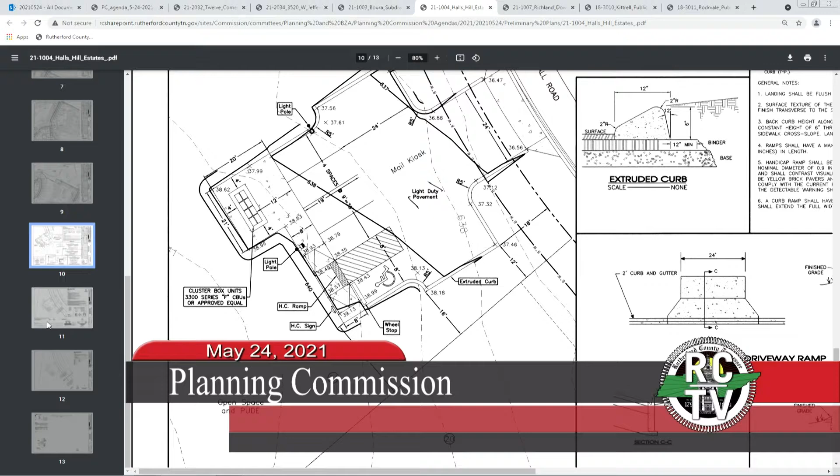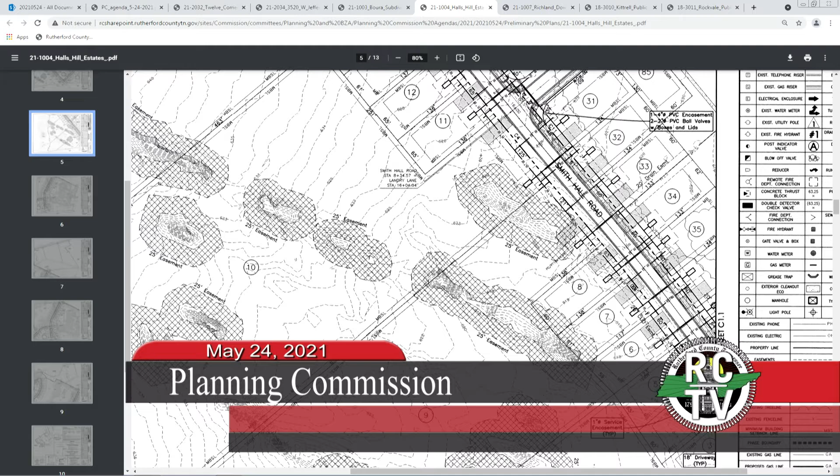These are the ones I was talking about. It's going to be tricky getting a step tank, and they're showing a driveway right here next to the step tank on the edge, so that sinkhole is going to have to get modified, at least to allow a safe passage through here. But then they've got this other sinkhole they've got to cross to get back to the area in the back.

So these will most likely be critical lot grading plans because of the geologic features here, and we will pay special attention to those. But like Doug said, they have addressed our comments, and we will work with them on the design of the construction plans.

Right, and that was some of our concern. When the original development came in, they had proposed to extend streets back in here, the road network and everything, and the lots were a lot larger, but they did extend into this area. If you've ever seen a USGS map, you can kind of see sinkholes will line up and look like a tree, with branches of sinkholes coming off in other directions.

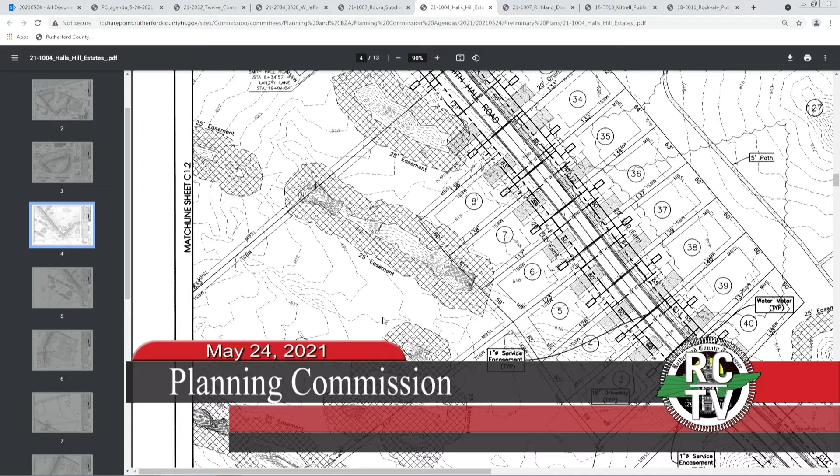So can the property owners, like on those large lots that have all the sinkholes on them, can they do anything with that back lot? Yes, that's their property. They can use it as they see fit. But any construction around any of these identified sinkhole areas would definitely need a geotechnical report if they wanted to build anywhere near those.

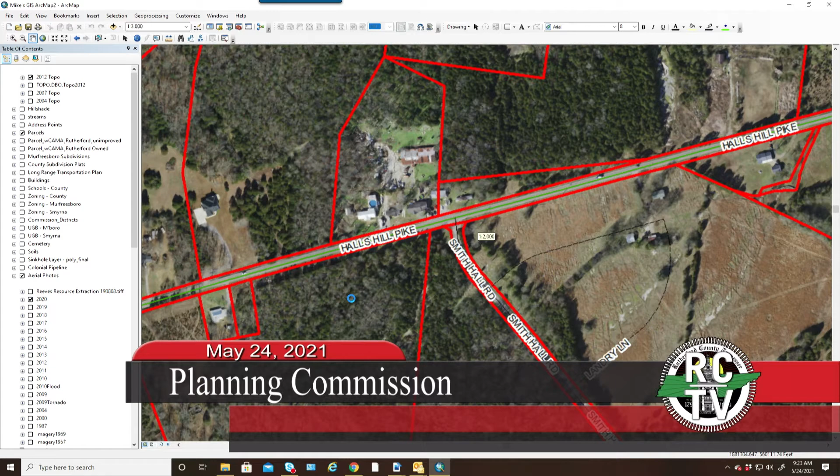Looking at the land, the soil, I believe it is mostly our old friend Gladeville rock.

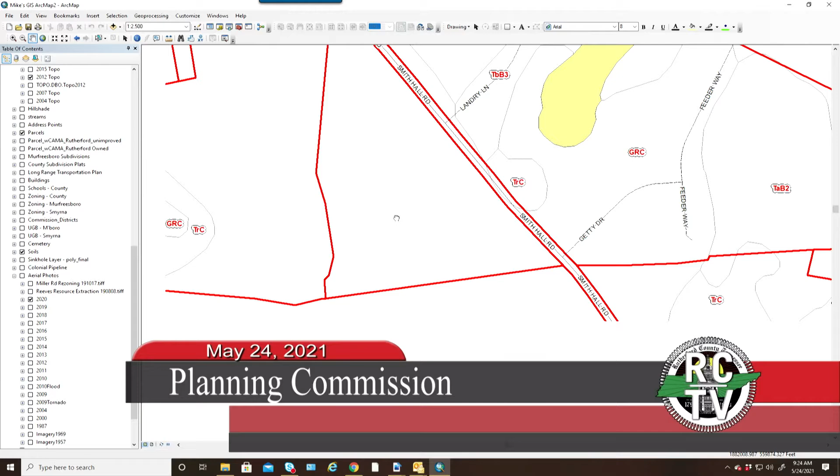Yeah, GRC, Gladeville rock. So it's just rocky ground, and if they do a conventional septic system back here, they're using the good low area for their septic system.

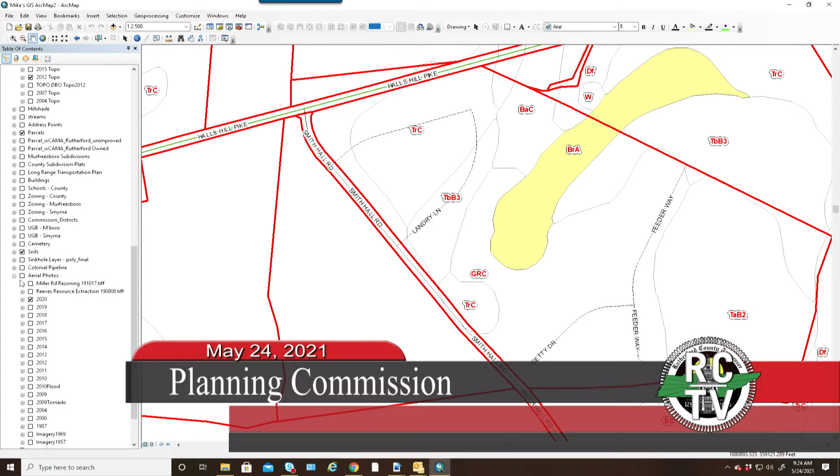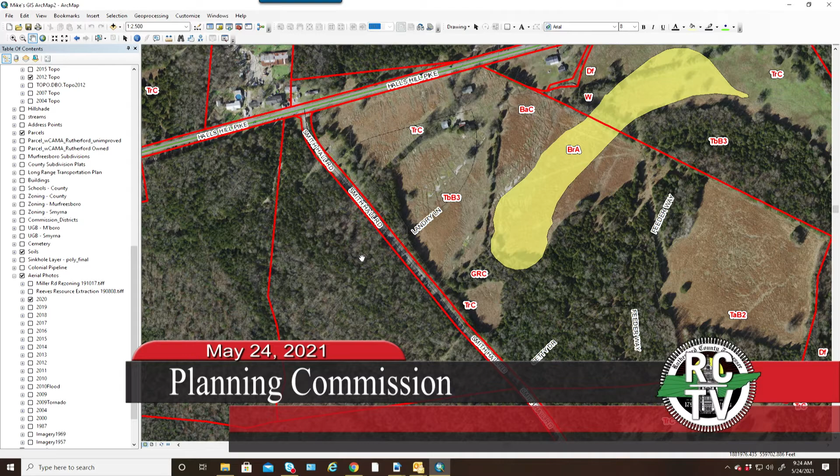You can see on an aerial that you've got a piece of property with heavy tree cover. There are several reasons - it's either too rocky, too steep, or there's some other feature that it can't be farmed, and that's been the case with this one. It's too steep and rocky.

So that's what we're making sure with construction plans review, with home construction, anything - this is an area that we're going to have to keep special attention on.

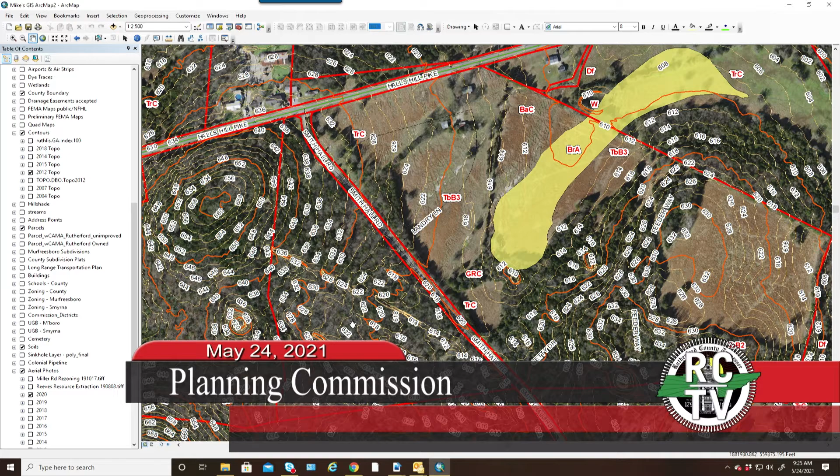There'd be notes that relate to discharge. I know some sinkholes discharge at times - would these be identified whether they ever have any discharge? Well, the underground connectivity of the sinkholes, the karst terrain - most sinkholes are connected one way or the other. And sinkholes take on water, but they can also pump water out.

So it will need each lot on that side specifically will need a critical lot grading plan to make sure that the house is protected in an elevated area. So if the sinkhole does fill up and start to spill out, it won't be directed toward the house - it can go a different direction away from it. We'll have to keep special attention to it.

So I don't mean to dominate the conversation, you guys.

Why did the developers decide not to develop what was approved before and go with something different? I think a lot of it had to do with the location of those sinkholes. Prior to this particular design, they were looking at 15,000 square foot lots, but those sinkholes were impacting a lot more of the individual lots than what this plan is showing. There are still some that are there that are impacting lots.

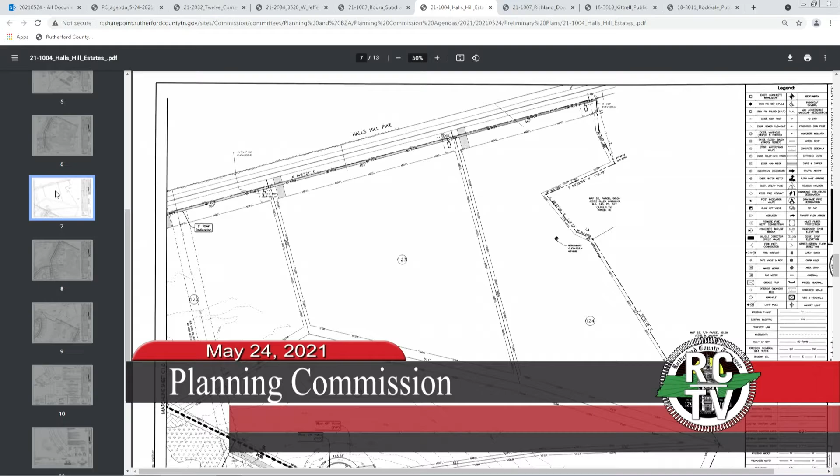Okay, so right here you can kind of see at the top of the page, you could probably get one or two lots right there, and move that playground towards the kiosk up front where you've got a parking area. That was just us thinking out loud.

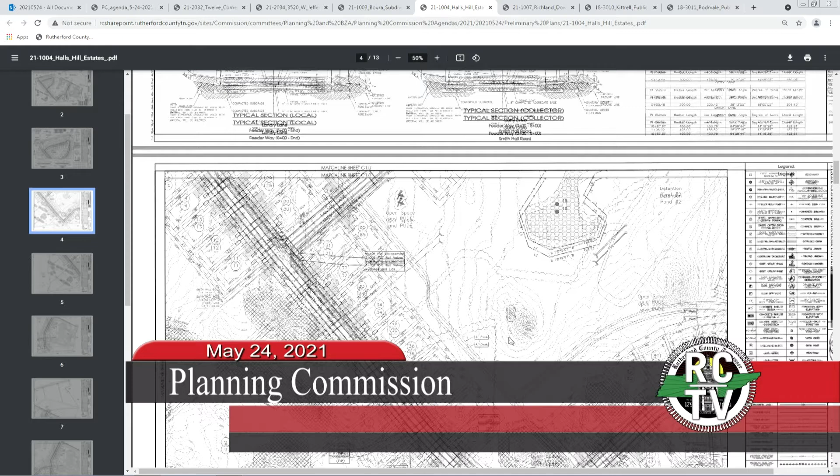Why not move that playground over here, and people can come over here and park and let the kids play, pick up their mail, and then go back to the house. Then you can pick up a couple lots there instead of having these big open space lots that you've got to span these sinkholes. The ground looks pretty good where this playground is located. So that was just our kind of a side thought.

I know this is a preliminary plan, and we'll have to see it again, but it looks like there's a lot of information that needs to come to staff before a final plat is presented to the Planning Commission. And from a preliminary perspective, is there a recommendation from staff?

As far as the comments we had, I think we were comfortable with what they were presenting, as far as did it meet our regulations. So from that standpoint, from just the preliminary plan, I think we're okay moving forward with it. Now there's still a lot of information that needs to be brought forward during the construction plan phase, and that'll have to be all fleshed out before you ever see a final plat come before the Planning Commission.

Sinkholes are pretty common. They still make me nervous, but as long as you've got a good geotechnical engineer... and down here on lot 1, you can kind of see one into the road a little bit. That's definitely going to have to be taken care of. We don't want our road failing, but is it the best idea?

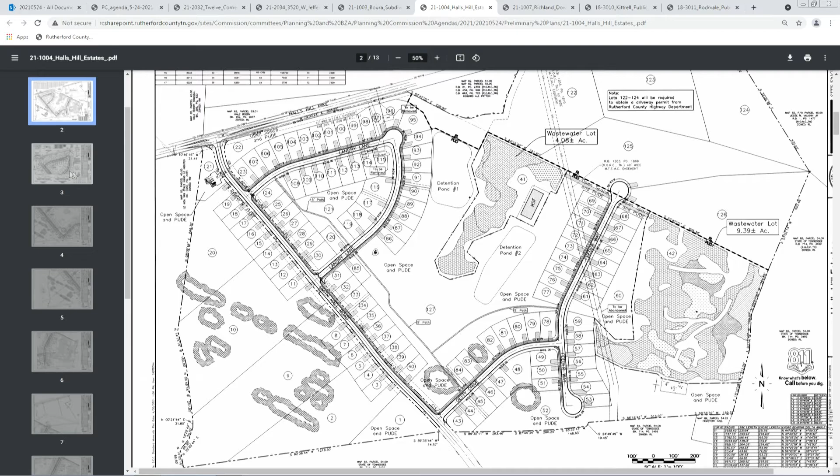Just to preserve those sinkholes and what you were worried about - it's not necessarily the sinkholes that you see, it's the sinkholes that you don't. Right now, the owner, if he builds on it, he might be 300 feet away from any of the sinkholes, and in theory it could still have a sinkhole there, but that could be said anywhere across the county. We do the best that we can, and the geotech would have to be comfortable with what was built, because most of these will have to be critical lot, as Mike said.

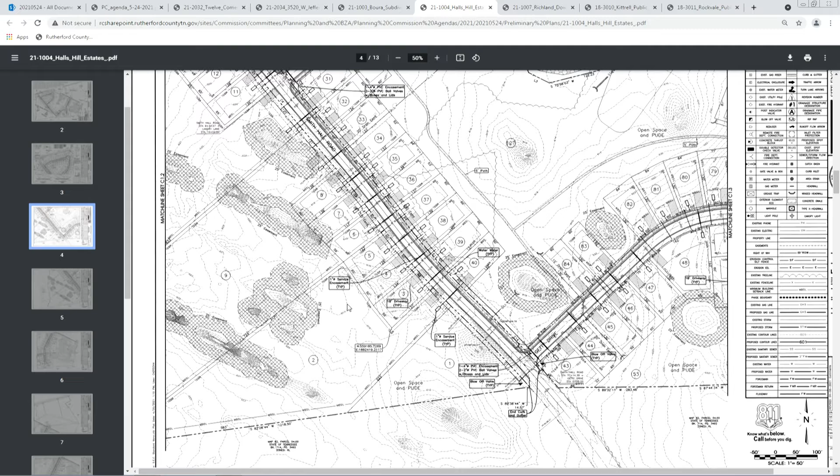So we had one that surprised us, at Creeks Bend, where it crossed the road in several lots that John T. Holloway had to pay to have closed. It was pretty substantial. Once construction has started and all the trees have been cleared out, it is possible that they would find more, but anything additional they found, they would have to close.

It's the thought of large lots that have sinkholes on them. Why that instead of creating just normal sized lots and using that as common space, so that the HOA would have responsibility for it and not the property owner?

Well, I think a big part of that now is just people still want those larger estate lots, and they're very hard to come by. So it's kind of a give and take. I know the lots on Clear Creek, those estate lots, they're quite large, but you have probably 300 feet of it that's not buildable because of floodway, floodplain, etc. And it's kind of the same situation on these.

Whatever house plan came about for those larger lots, they still couldn't build around those sinkholes. So they're still restricted, but they would get the benefit of having a larger yard and lot. Because I know the county gets lots of complaints about people only having a 20-foot backyard. Right, so that's one of the benefits of leaving it as somebody's property - they get a nice area.

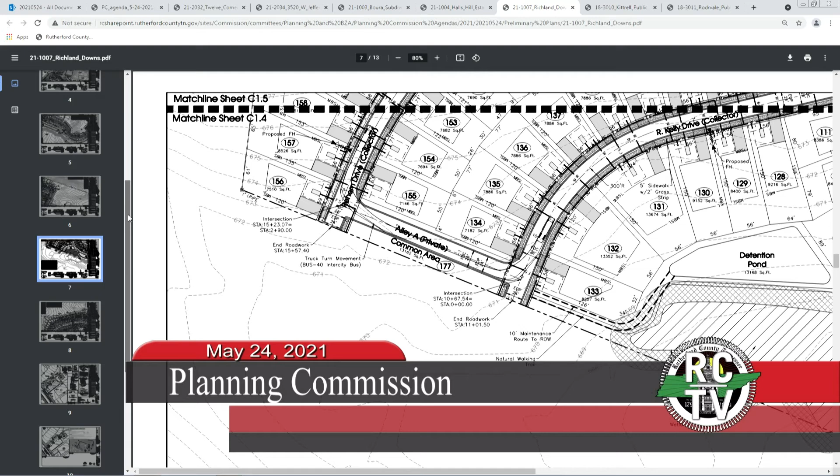It's kind of a little bit different from what we've seen in the past. And like Doug said, there will be a connection here.

Ideally, these roads will be completed at the same time. We won't need temporary turnarounds because the layout of the driveways and step tanks would be in the way of a temporary turnaround. We'd rather not have one, because these lots would probably need to wait until it's removed.

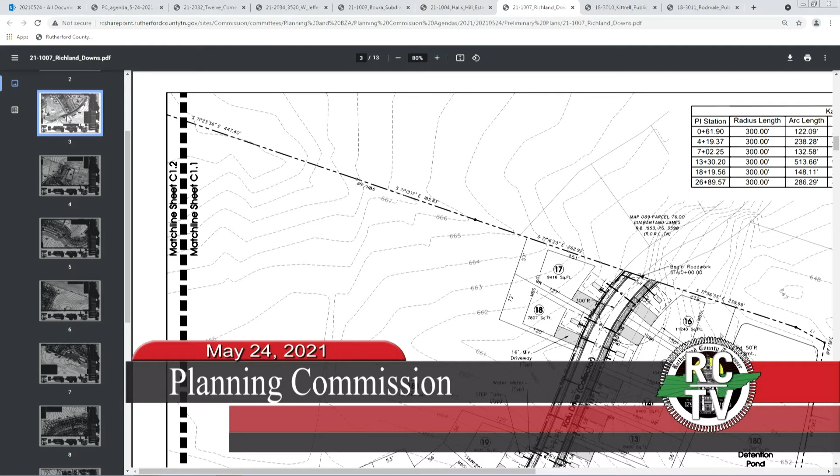There were some streams identified and wetlands, but they've kept the development out of those streams and wetlands. There's an area on the southwest edge of the property, and there's a little stream that's been identified that meanders in and out of the development.

Let's see, what else? They are proposing several stormwater detention ponds. Let's see, 1, 2, 3, 4, 5, 6, 7, 8, 9 detention ponds. So because of the way the land breaks in several different directions, they'll have these different stormwater management areas.

There is a mail kiosk in this location. Everybody will be getting their mail here. Let's see if I can find where that shows up on the plan. You kind of see it here with a little playground area, the mail kiosk, and a bit of a walking trail there.

All in all, like Doug said, I believe they've addressed all of our concerns on the preliminary, and we will review this in more detail with the construction plans. Thank you. Questions, comments?

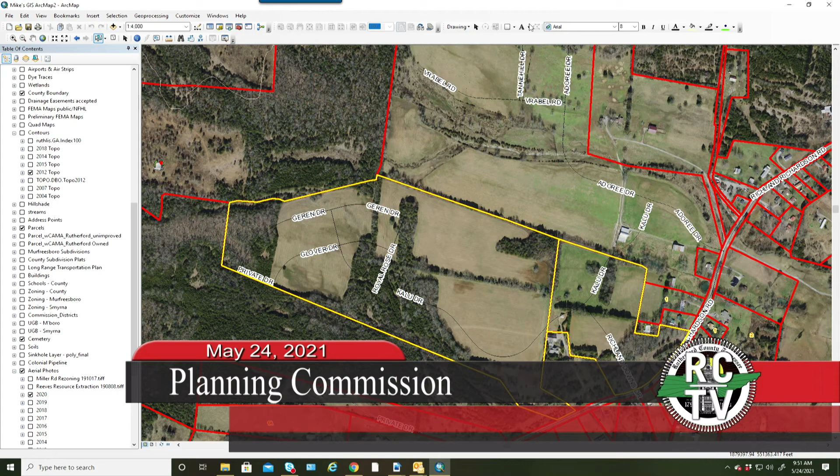Mr. Chairman, I have a question for Mike. Mike, you identified wetlands. Are they having to do any wetland mitigation, or are they just leaving those undisturbed? They're going to leave them undisturbed, preserve it, and keep a buffer around it. Likewise, the stream that it empties into will have a buffer, and we'll preserve those.

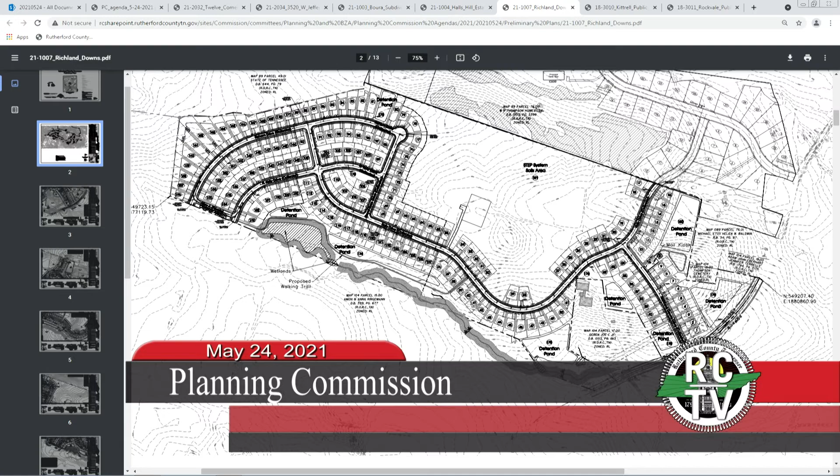Mr. Chairman, if there's no other questions, I'll make a motion that we approve, subject to all staff comments. We have a motion and a second to approve a preliminary plan for Richland Downs, item number 21-1007. Other questions or comments? All those in favor of the motion to approve, please say aye. Any opposition? Motion to approve carries. Thank you. That concludes our preliminary plan. We've just preliminarily approved over 300 new lots.

6B, items submitted for final plat approval. 6B1, the item number is 21-2034: 3520 West Jefferson Pike subdivision, 3 lots on 1.37 acres zoned RM, located off West Jefferson Pike. K&B Investment Partners is the applicant. Doug? Yes, sir. Thank you.

The Planning Commission approved an off-site sewage disposal system waiver for this property back in March of this year. As we stated during that meeting, the applicant is proposing to split this property into 3 lots. The existing residential structure on Lot 1 will no longer be accessory, so they will have to make an application for a rear setback variance to the Board of Zoning Appeals, which they have done. That will go to the Board of Zoning Appeals next month in June.

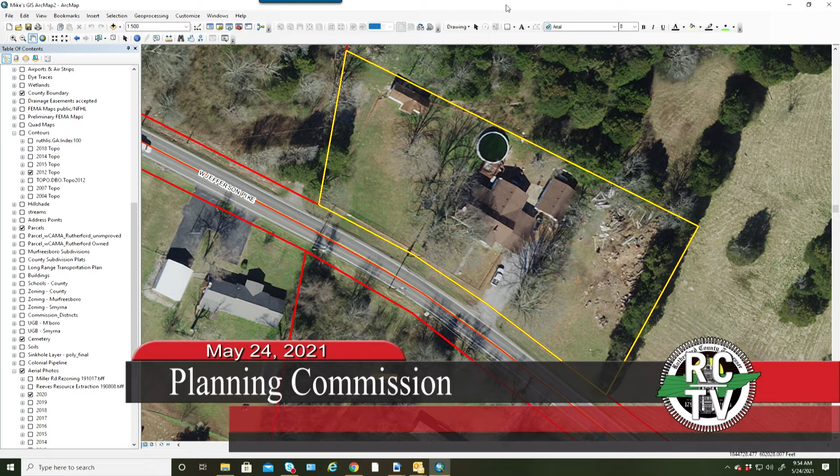The other lots—of course the existing home in the middle will stay, and then they'll have another building lot, I guess on the eastern side, as you can see on the plat map before you. So again, the waiver request is for the existing SSDS, as you can see on the plat for Lot 1. That's in favor of Lot 2. So there are soils shown on the other ones.

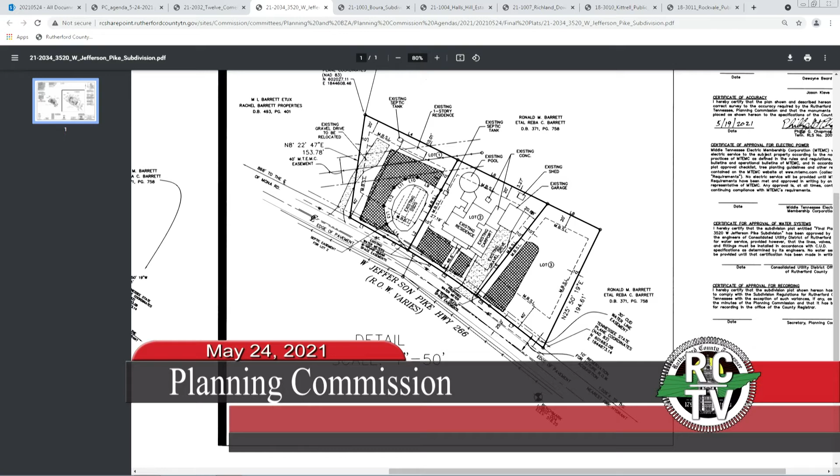As far as our comments are concerned, this appears to be in good order. Our comments have been addressed. With that, I can't approve a plat administratively that has a waiver, and this is also 3 lots, so this would have to come before you regardless. We'll be happy to answer any questions. Staff recommends approval. Thank you. Any questions?

Mr. Chairman, I move to approve, with staff comments. We have a motion and a second to approve the final plat for item 21-2034, 3520 West Jefferson Pike subdivision. Other questions? All those in favor, please say aye. Any opposition? Motion to approve carries. Thank you.

Final plat for item number 21-2032, 12 Corners, Section 2, Phase 2, 28 lots on 16.7 acres zoned RL, located along Pegasus Run. RHB is the applicant. Doug?

Yes sir, thank you. The preliminary plan for this development was approved by the Planning Commission back in April of 2019. This is consistent with that preliminary approval. We did have several comments on this, and we sent those comments to the applicant's design engineer. Those comments have been addressed. There are a couple of sinkhole locations here that were filled. They need to show the locations of those and provide a geotechnical report to our engineering staff. We have requested that information. I don't believe we've received it yet, but we'll make sure that it's addressed and reflected on this plat before we allow it to be recorded. Besides that, our other comments have been addressed, and we'd be happy to answer any questions. Thank you, Doug.

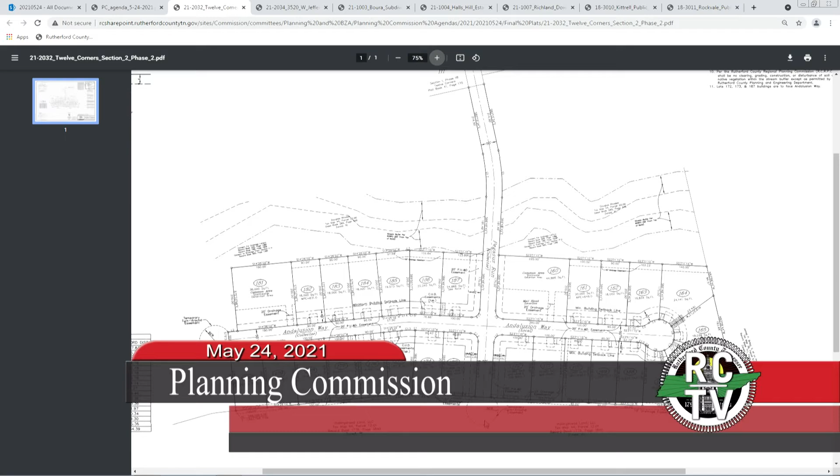Mike, anything? No sir. They will have a mail kiosk in this area, and I believe there are a couple of detention ponds, one in 160 and one in 181, and it'll be an extension of Pegasus Run over this stream here, with a temporary turnaround. The developer owns the adjacent property, so we'll put a temporary turnaround here and here. North is actually to the right as you're looking at it, so there'll be a temporary turnaround on the south and to the east here.

Well Doug, one way to prevent conversation on a final plat with sinkholes is not to put them on the plan. Where are the sinkholes that are not on the plan? Well, that's what we've requested the information about. Apparently they filled some sinkholes and we're waiting for the geotechnical report on that. Those will have to be reflected, that certain lots had ones that were closed, and the geotechnical report, there'll be a note on the plat to that effect.

You're comfortable with us approving the final plat subject to our comments? Okay. Likewise, just if it walks like a duck, talks like a duck, you know, we treat it like a duck. So...

Any of the lots that were in these areas where they show these circle contour lines, we'll make sure that those have compaction reports before we release those.

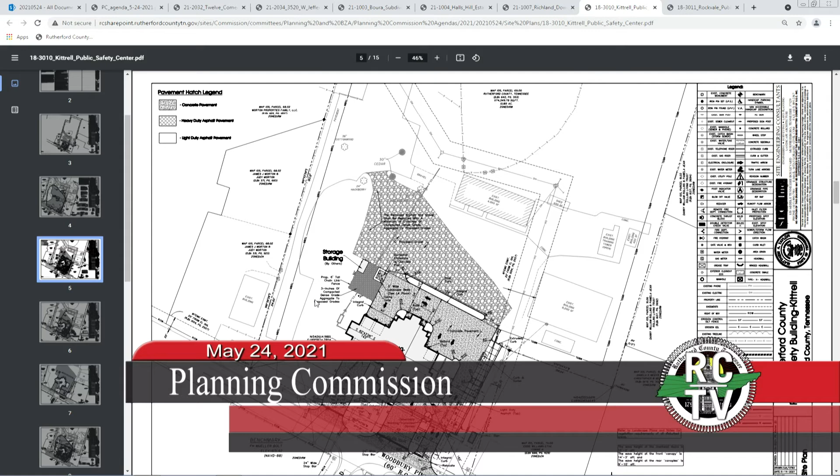We did have several comments that we sent to the applicant's design engineer, a couple of which bear a little more discussion. For the most part, we're comfortable with the plan. There are still discussions ongoing about the adequacy of the existing septic system on the property, and discussions with TDEC about what might need to be done. Also, regarding access to the property, there are several utilities, electric poles and things that will have to be moved to accommodate it. Those are just for the Planning Commission's information. Those are the biggest outstanding comments, but they're things that do need to be worked through. With that, we'll be happy to answer any questions you might have.

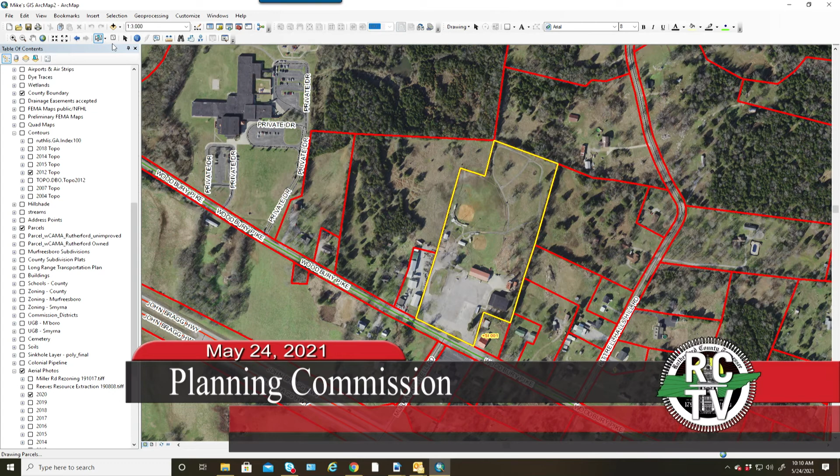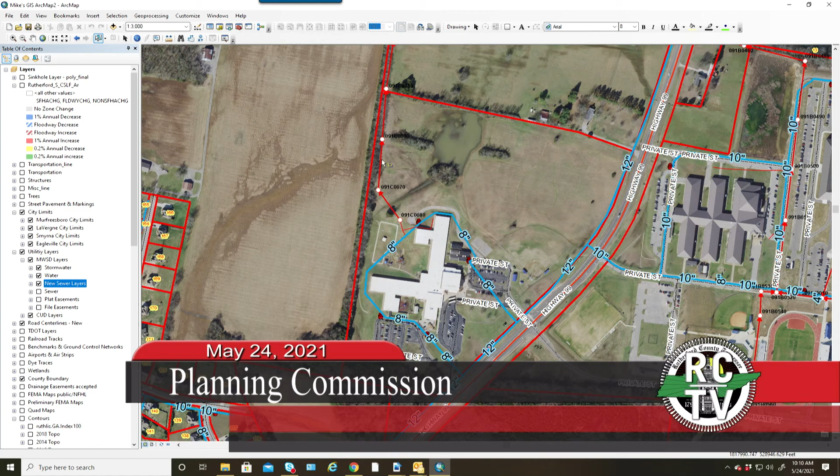This also is going to be served by sanitary sewer from the city of Murfreesboro, so a force main will be constructed to the existing sanitary sewer toward the rear of the subject property. Because of that, they'll need city approval as well. Beyond that, the comments we sent to the applicants, the county's design engineer, have been addressed. This plan does appear to be in good order. So with that, we'll be happy to answer any other questions.

Commissioner Reed moved for approval with staff comments. I have a motion and a second to approve the Public Safety Center at Rockvale, item number 18-3011. Any questions? All those in favor of the motion to approve, please say aye. Is there any opposition? Motion to approve carries.

One really quick comment. Too often we're reacting and not planning. This is one of those rare items where we have a chance to really plan for the long-term future of the county, and that does my heart good. Commissioner Reed, along with the mayor's office and others, has spent countless hours on this, and this community should be indebted to you. Good job, Commissioner Reed. I appreciate you, bud.

Staff comments and reports. Thank you, just a few items to consider.